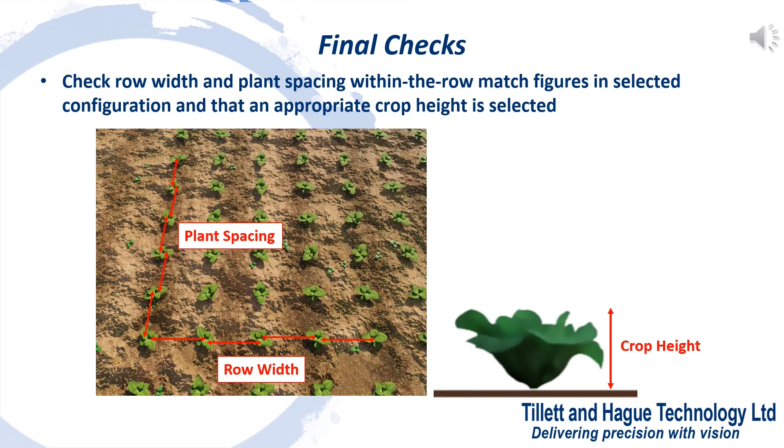Check the disc size entered in the selected configuration matches the discs fitted and that they are appropriate for the crop. Disc size is the first part of the disc's part number and should be stamped on the disc.

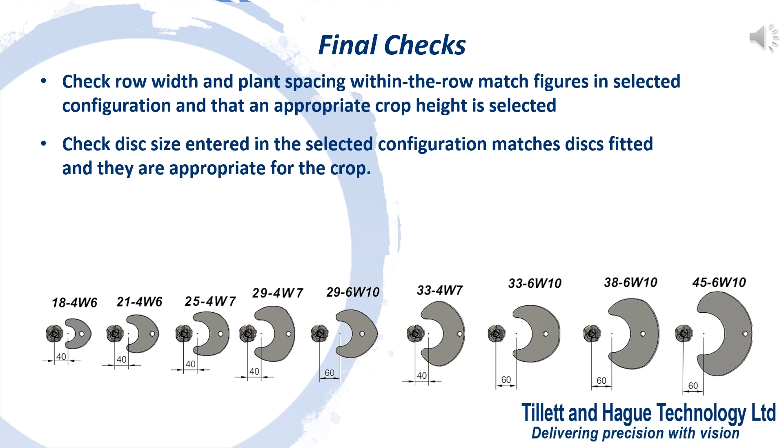If you are running either reciprocating blades or nozzles, you need to check the plant zone distance that defines the buffer zone around the crop plants.

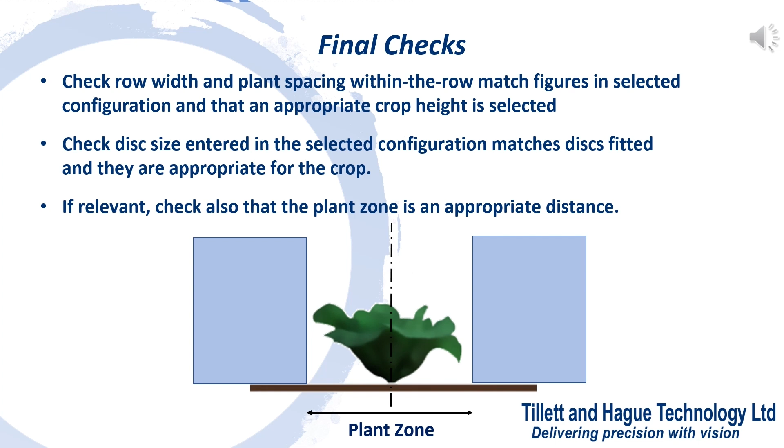Rotors will be given an automatic check on startup, but it's a good idea to do a quick check that other devices such as levelling and steering work normally.

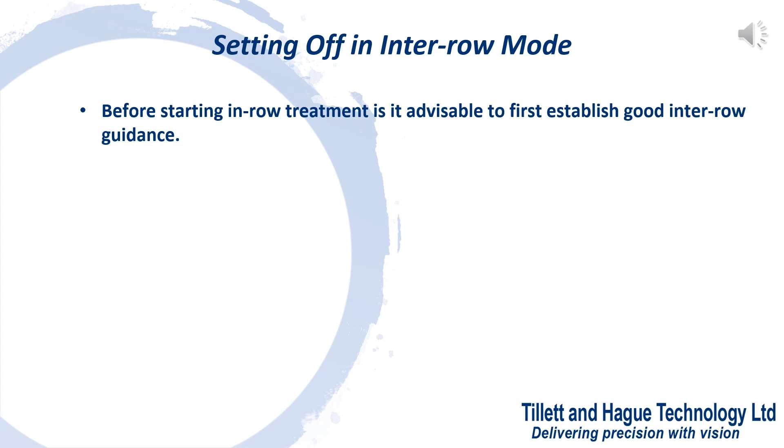In-row weeding machines are inter-row implements with an in-row weeding capability added. It's much simpler to check the inter-row performance independently before adding in-row devices. To minimise crop damage, remove or raise out of work anything that might cause crop damage.

It does not matter if initial running is done using inter-row or in-row software, as both store camera skew and fine offset learn parameters in the same place.

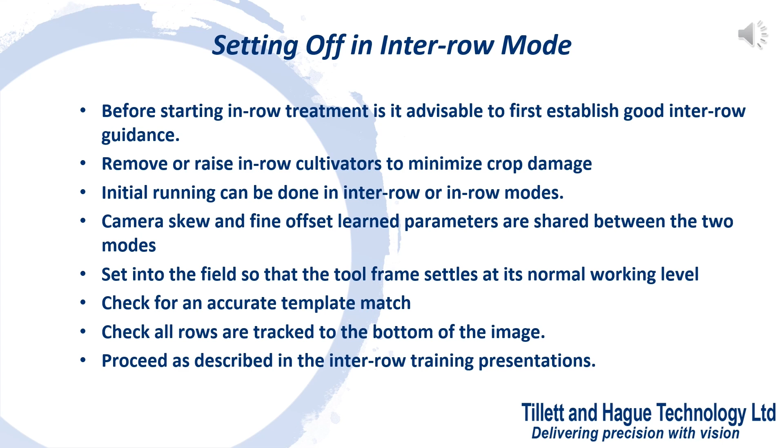Place the implement down and move forward just enough to settle it at normal working level. Check for a good template match and that all rows are being tracked to the bottom of the image. Set off slowly as described in the inter-row training presentations.

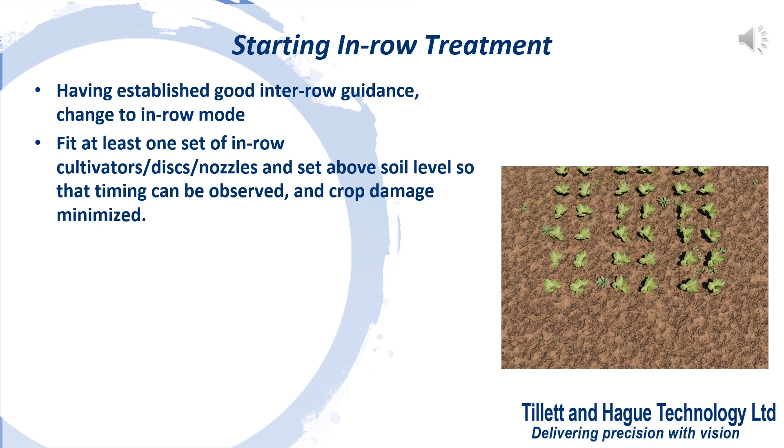So, having established good inter-row guidance, now is the time to change to in-row mode. Fit one set of in-row cultivators or discs and set above soil level so that timing can be observed. If you have nozzles fitted, fill the tank with clean water.

Place the implement down so that the first plant to be treated is in the top two-thirds of the image. Check that a blue-green cross has been placed on each crop plant.

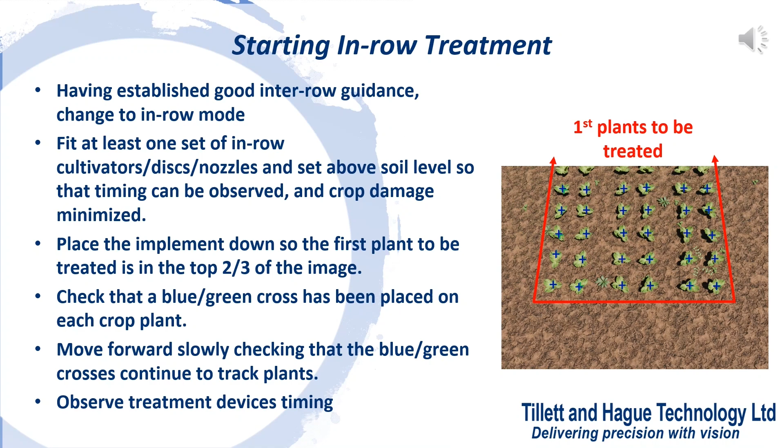Move forward slowly, checking that the blue-green crosses continue to track the plants, while observing timing of the treatment devices relative to the plants. It is very likely that you'll need to make small adjustments to timing using the fine offset up and down arrow keys.

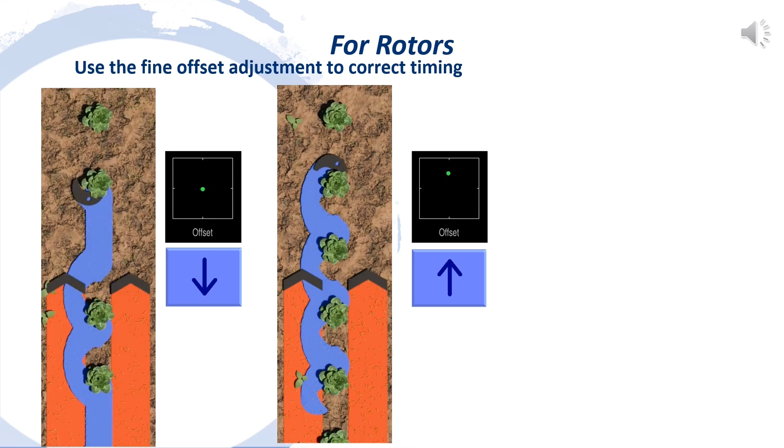If you are running rotors and they are cultivating ahead of the plants like this, press the down arrow keys to move the green dot down. If they are cultivating behind the plants like this, press the up arrow keys to move the green dot up. When they are correctly in phase, it will look like this.

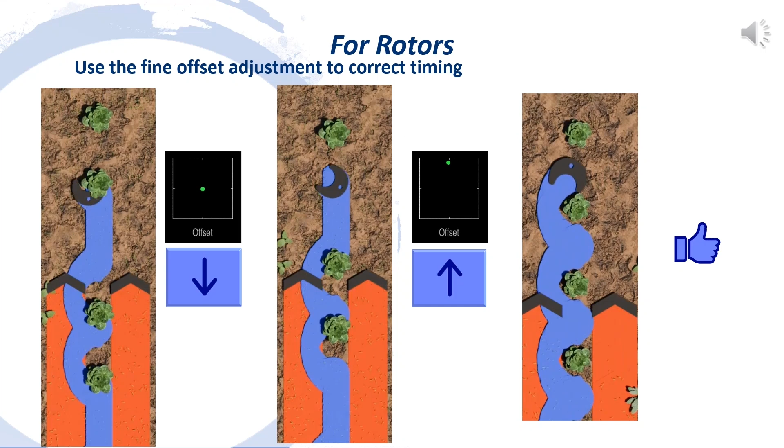If the machine has multiple cameras, you will need to repeat the procedure for each camera in turn.

Once you are satisfied timing is correct on all cameras, you can add the remaining rotors and set them for shallow cultivation.

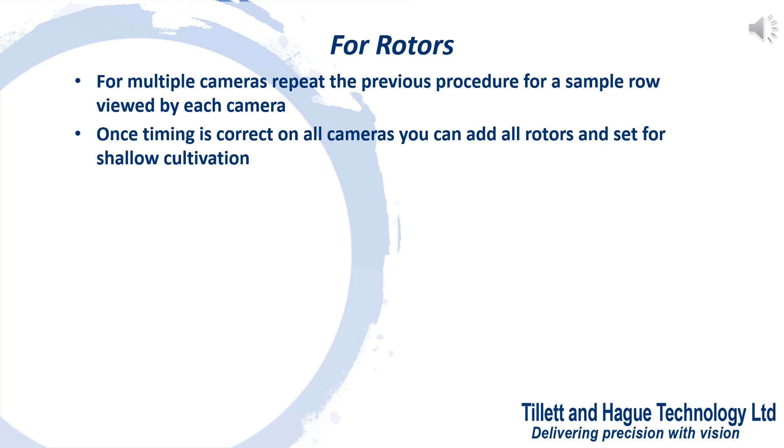Speed can be increased to suit the application, with a maximum of 3 plants per second for hydraulic rotors and 5 plants per second for electric rotors. In practice, soil conditions normally restrict speed to 3 plants per second.

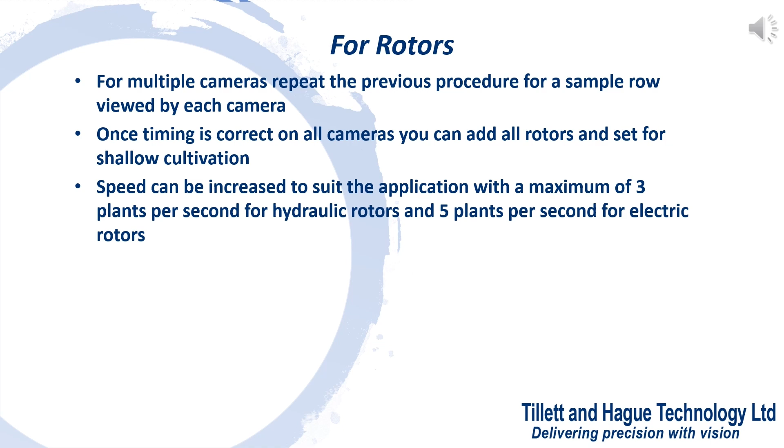There should be no change of timing as speed increases, as this video of an electrically driven rotor running above ground demonstrates.

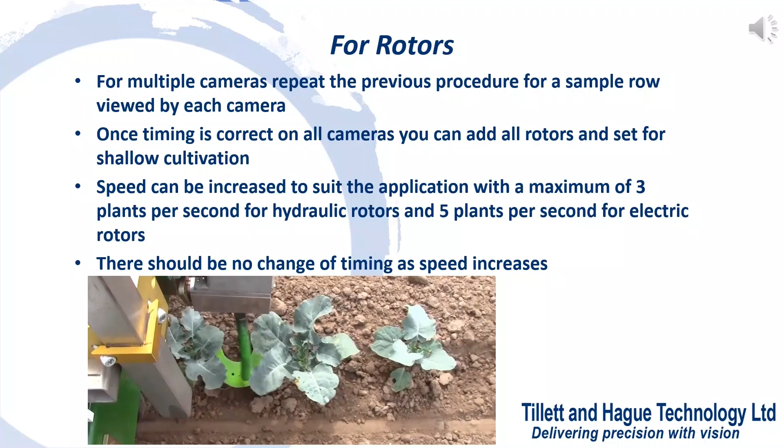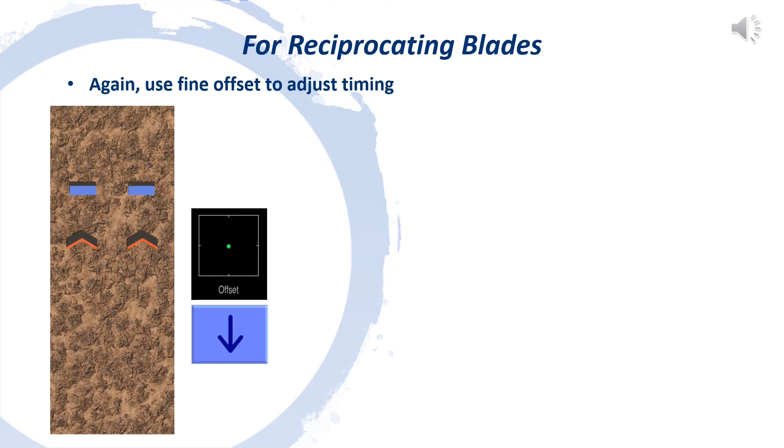For reciprocating blades, the procedure is very similar. If they are cultivating ahead of the plants like this, press the down arrow keys. If they are cultivating behind the plants like this, press the up arrow keys. When they are correctly in phase, it will look like this.

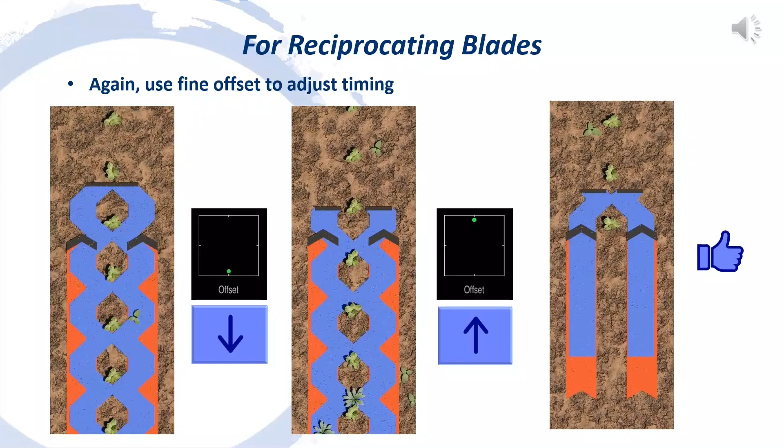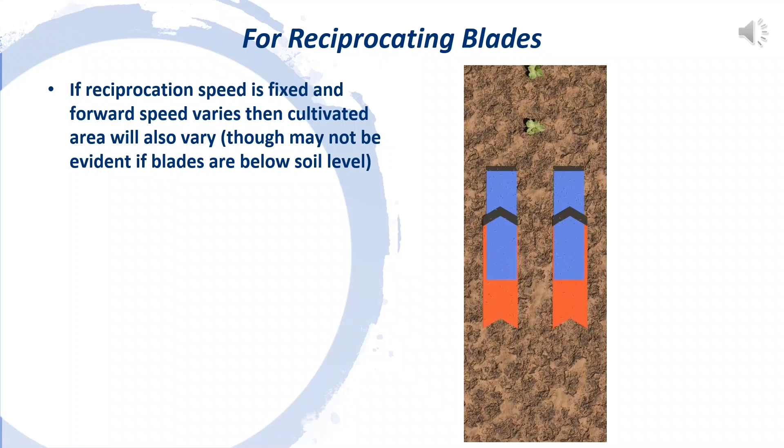If reciprocation speed is fixed and forward speed varies, cultivated area will be reduced as forward speed increases, as illustrated in this simulation. In the field it's not normally obvious, as blades are hidden under the soil surface. It follows that for best weeding efficacy, forward speed should be low in relation to reciprocation speed.

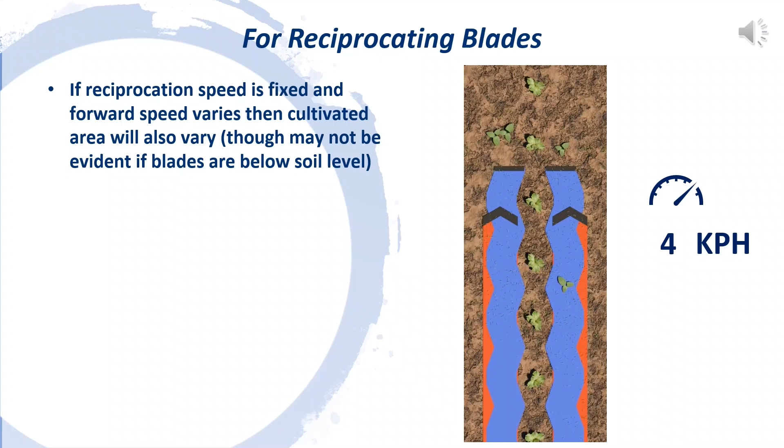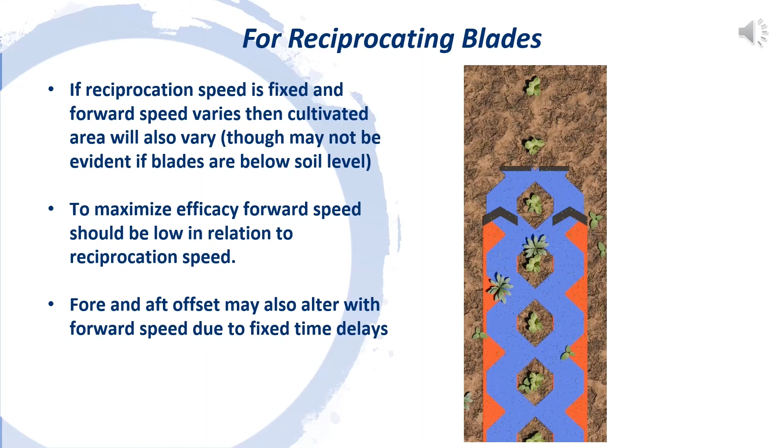It is possible to at least partially compensate for changes in offset due to time delays, but for maximum precision, we would recommend operating reciprocating blades at a fixed speed.

When you increase plant zone, you increase the distance between the point the valve is activated and deactivated, symmetrically around the plant centre. Plant zone adjustment is accessible via the setup page on the console. If plant zone is close to or greater than the plant spacing, the reciprocating blades will not reach between the plants, so only inter-row cultivation is achieved.

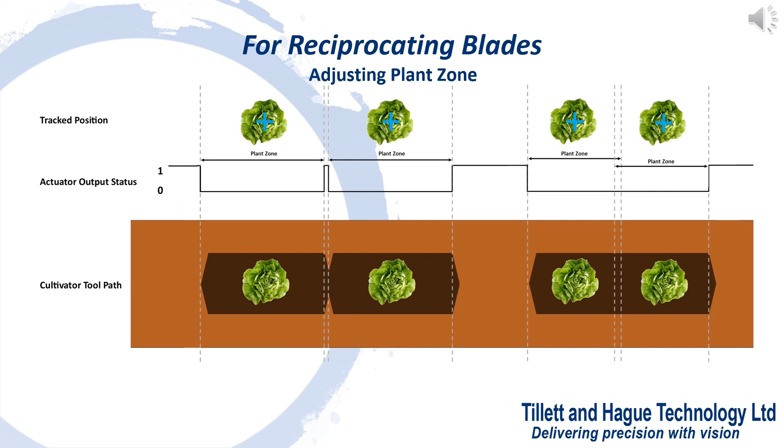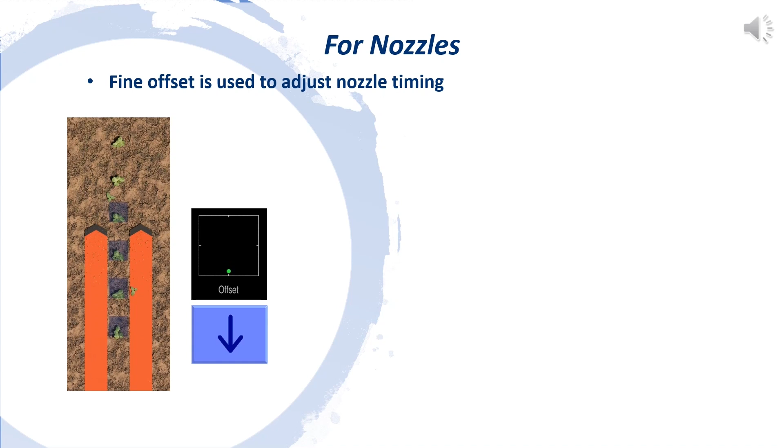For nozzle fine offset adjustment, the procedure is very similar, and for the purposes of the following animations, we will assume that we are spraying the crop. If they are spraying ahead of the plants, like this, press the down arrow keys. If they are spraying behind the plants like this, press the up arrow keys. When they are correctly in phase, it will look like this.

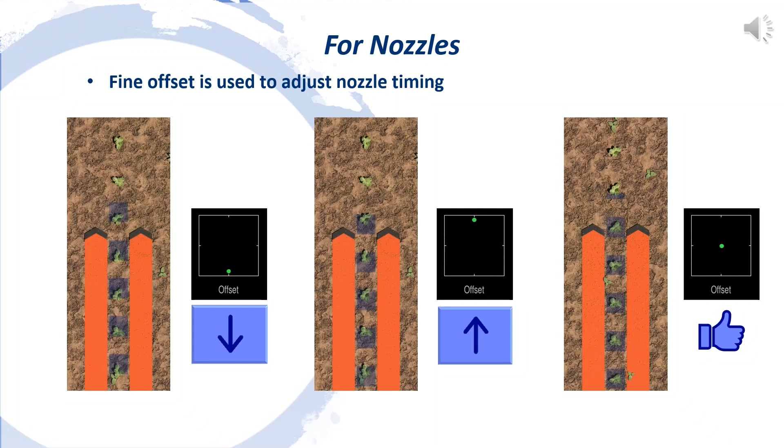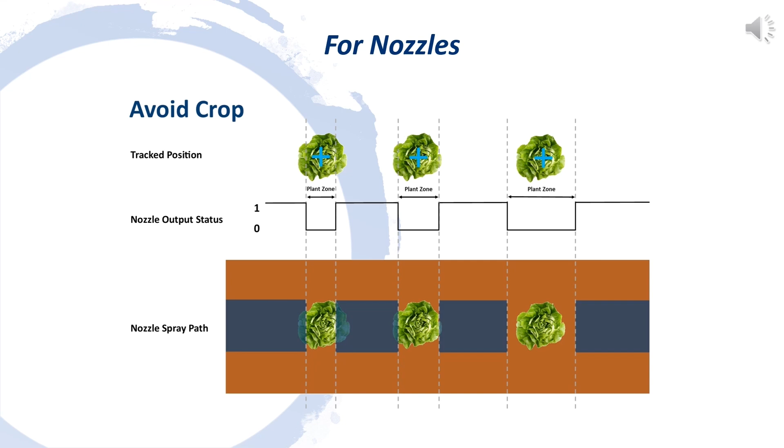Nozzles can be configured in the setup page to either spray just crop plants and nothing else, as depicted here, or to avoid the crop and spray just between crop plants, as seen on this slide. Plant zone can be adjusted in the same way as for reciprocating blades, allowing you to get further or closer to plants.

Once all the devices are timed correctly, you'll probably find that the fine offset values are not central. It is good practice to leave the customer with these at least close to zero, so they have scope for adjustment in the future. Lateral fine offset can be neutralised in the usual way, as described in the inter-row training material.

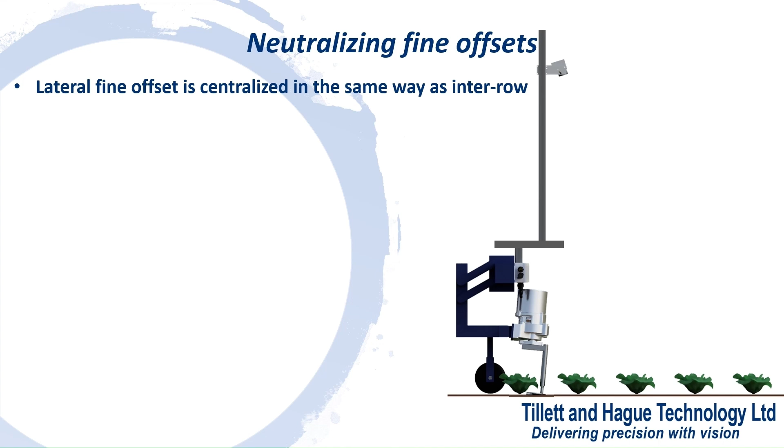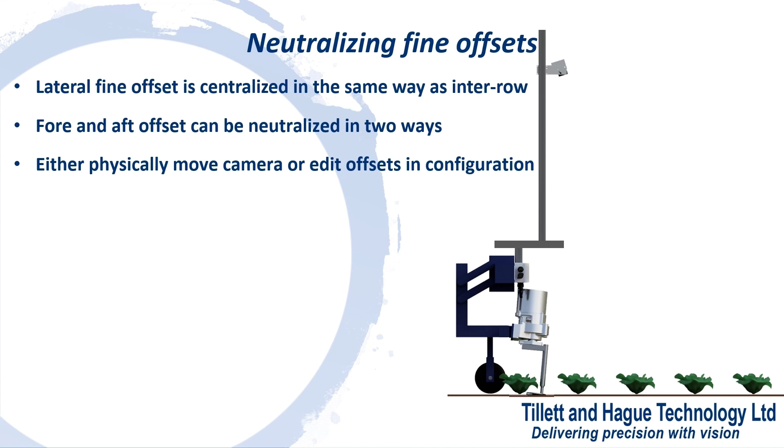Fore and aft fine offset can be neutralised in two ways. You can either physically move the camera fore and aft in relation to the cultivators or nozzles, or you can edit the offsets in the configuration. First, we'll consider the physical adjustment.

It is a good idea to think of the camera and the crop as a fixed datum, and decide which way you want to move the cultivators or nozzles to neutralise the applied offset. If the fine offset is forward, shown as upward and positive in the fine offset graphic, you would want to move the treatment devices forward closer to the camera. In practice, of course, it's usually easier to move the camera, so for a positive fine offset, you would instead move the camera backwards by the same amount.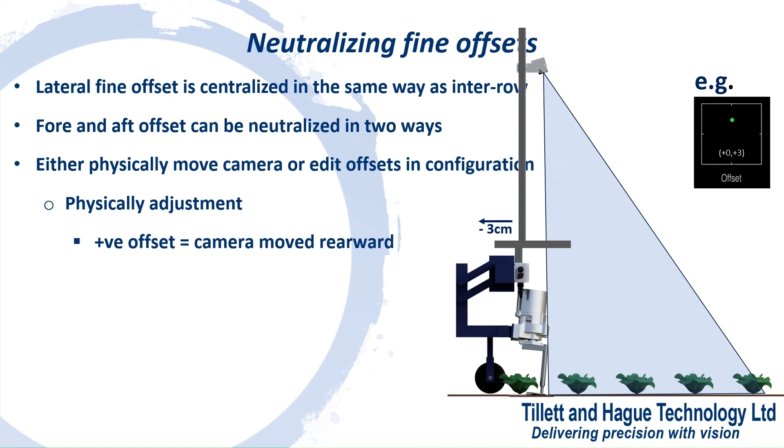For example, if an applied fine offset is plus 3 cm, the camera must be moved backwards by 3 cm. Similarly, if the applied fine offset was negative, you would move the camera forward. Note that it is important that all other aspects of camera alignment are maintained, and that this forwards and backwards movement is a pure translation.

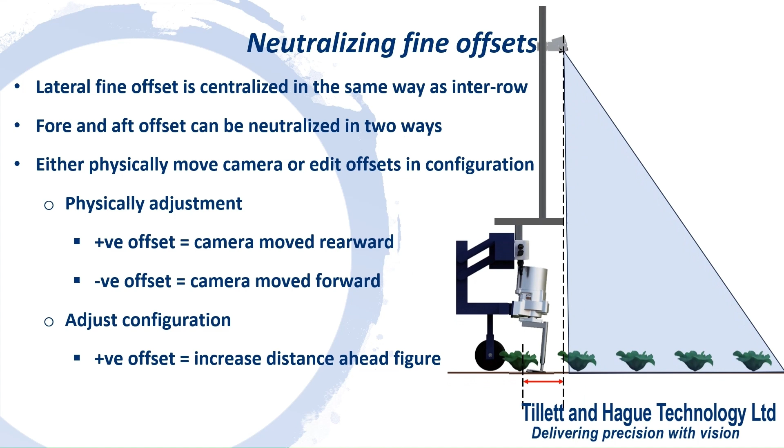Now we will consider the alternative of changing the camera distance ahead of cultivators or nozzles figure in the configuration, to have the same effect but without the need for physical adjustment. To take the same example, to neutralise a 3 cm positive fine offset, you should add 3 cm to the distance ahead of rotors figure.

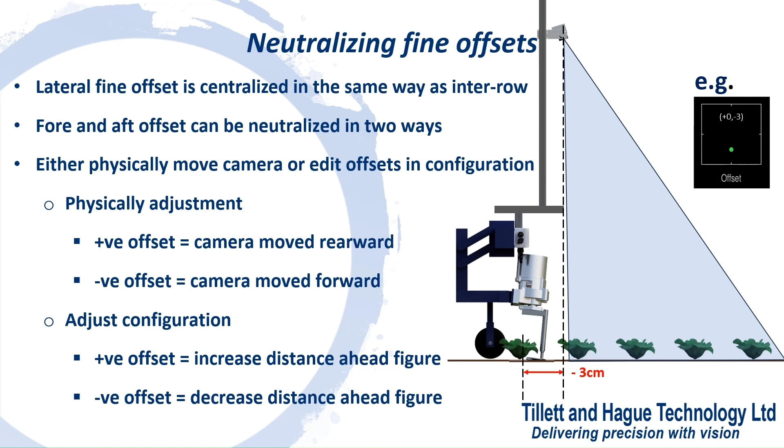You can think of this as correcting for the fact that the treatment devices seem to be further behind the camera than previously thought during the initial setup. You are correcting for that error rather than physically moving the cultivators. Similarly, if the offset is negative, decrease the distance ahead of rotors figure by 3 cm.

If you have multiple cameras, you should repeat this procedure for each camera in turn.